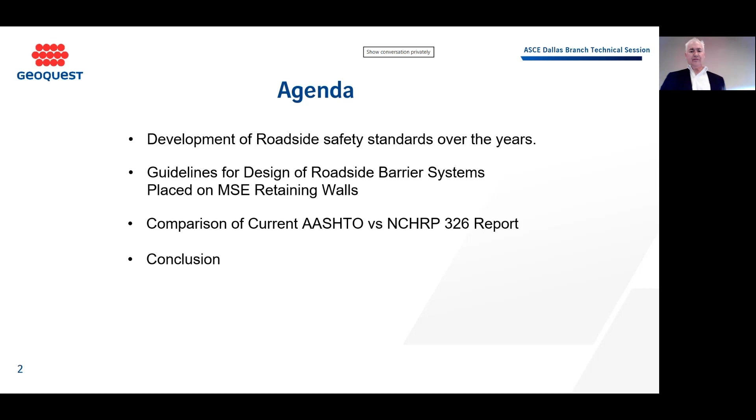So let me get into the development of roadside safety standards that has happened over the years. In the early 1900s, the birth of the automobile era happened. You had the development of the Model T by Henry Ford. Early automobiles shared the roads with horse-drawn wagons, and safety standards were virtually non-existent.

As we moved into the 1920s and 30s, rapid motorization led to increased fatalities. States began forming highway departments to oversee their road design. Roadside safety was primitive, and this was the start of early efforts for standardization of our roadway safety. The Manual on Uniform Traffic Control Devices was first published in 1935, setting national standards for road signs, signals, and markings, among other safety things. The introduction of the steel W-beam guardrail began in the late 1930s to prevent vehicles from running off a steep embankment, another development that happened in the 30s.

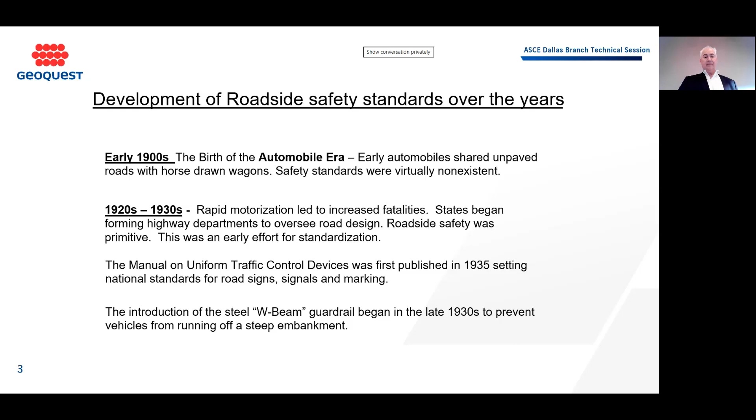As we move forward into the 1940s to the 50s, America built thousands of miles of new highways with more cars on the road, and they got a lot faster, so a lot more issues with fatalities could happen. Basic roadside hardware, guardrails, and bridge rails became more common in the 1940s and 50s.

In 1956, the Federal Aid Highway Act launched the Interstate Highway System. This entailed the numbering of roads, from east to west being even, and north to south being odd numbers. But it also triggered new safety engineering efforts, and introduced consistent design standards managed by what later became AASHTO.

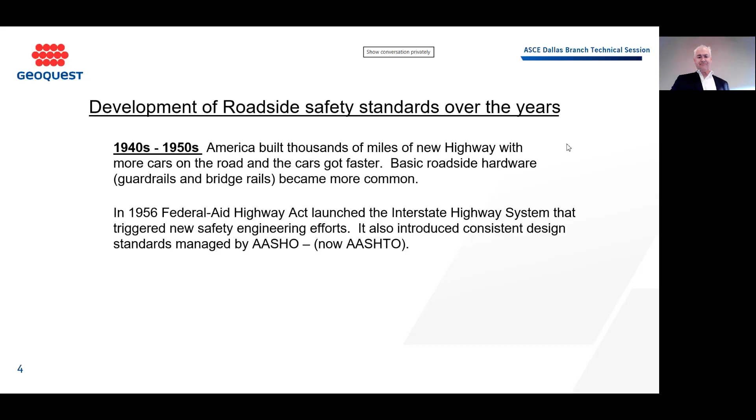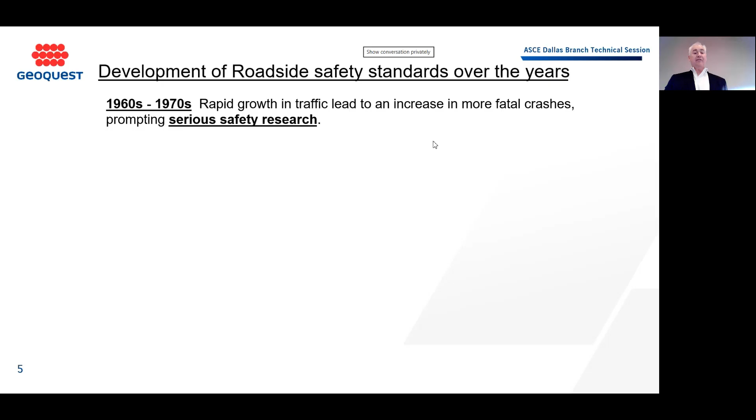In the 1960s to 70s, we had rapid growth in traffic, leading to an increase in fatality crashes. Cars got more congested on the highway, prompting serious safety research needs. In 1965, over 50,000 Americans were dying in traffic accidents each year, an alarming number that drew national attention.

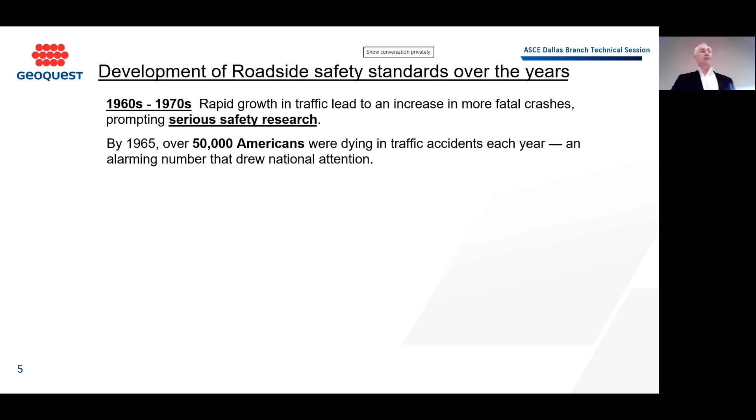In response, President Lyndon B. Johnson urged Congress to act, and Congress passed two major laws in 1966. One was the National Traffic and Motor Vehicle Safety Act of 1966, which focused on vehicle design itself, making certain safety features mandatory—this is where you probably got airbags and stronger cars. The other was the Highway Safety Act of 1966, focused on safer roads, driver behavior, and state highway safety programs. These two laws are considered among the most important laws passed in U.S. transportation history.

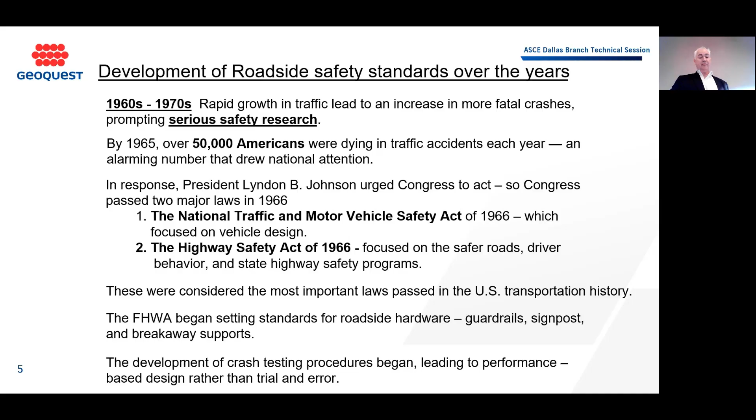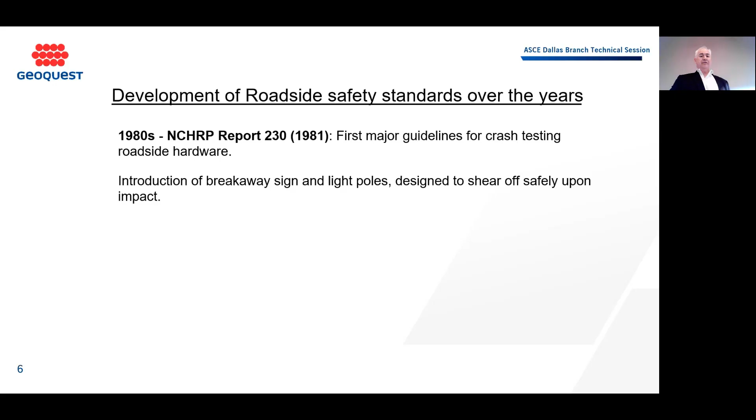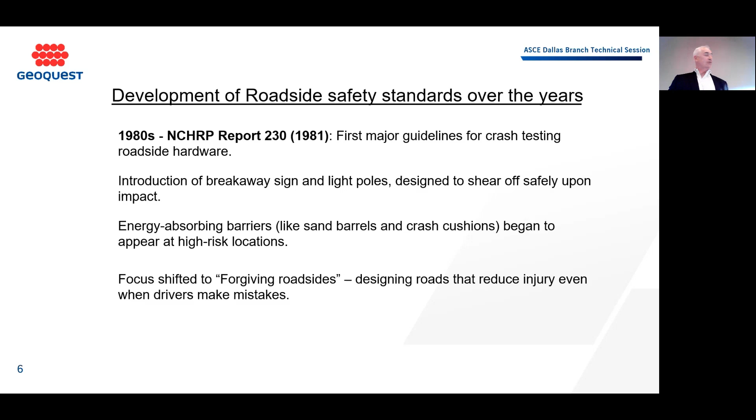FHWA began setting standards for roadside hardware, such as guardrails, signposts, and breakaway supports. The development of crash testing procedures began, leading to performance-based design rather than trial and error. In the 1980s, the first major guideline for crash testing of roadside hardware came out in the NCHRP 230 report in 1981. It also introduced breakaway signs and light poles designed to shear off safely upon impact. Energy-absorbing barriers like sand barrels and crash cushions began to appear at high-risk areas. The focus shifted to forgiving roadsides—designing roads that reduce injury despite driver mistakes.

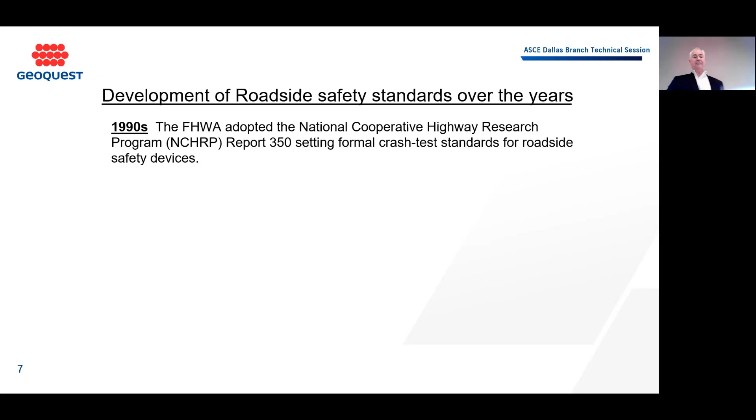NCHRP Report 350 set the formal crash test standards for roadside safety devices, published in 1993. This report was the first major national standard that introduced test levels, TL3 to TL5, for evaluating roadside safety hardware including guardrails, barriers, terminals, and crash cushions. Each test level corresponded to a specific impact condition, such as the vehicle type—was it a small car, a truck, a small van, or a semi-tractor trailer? It also looked at vehicle weight, speed, and the impact angle that the car would hit the hardware.

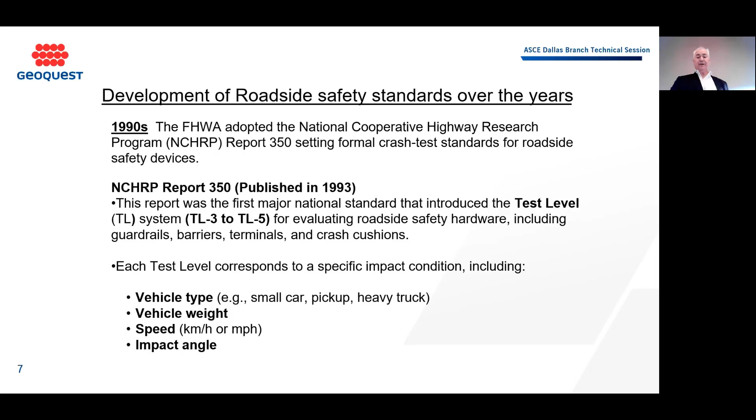So here's a summary of TL3 to TL5 from the NCHRP Report 350. You can see the test levels here, TL3 to 5, the vehicle type, the weight, the speed specified, the angle at which it would hit the barrier, and the typical use.

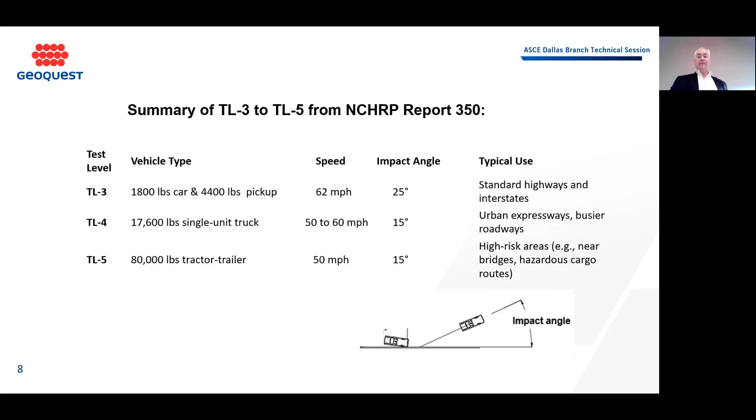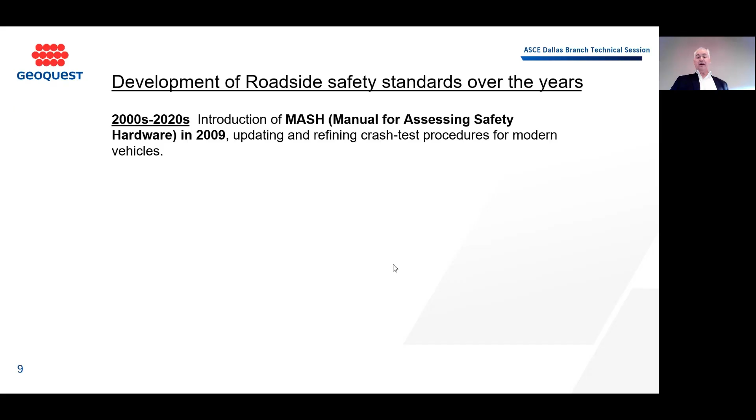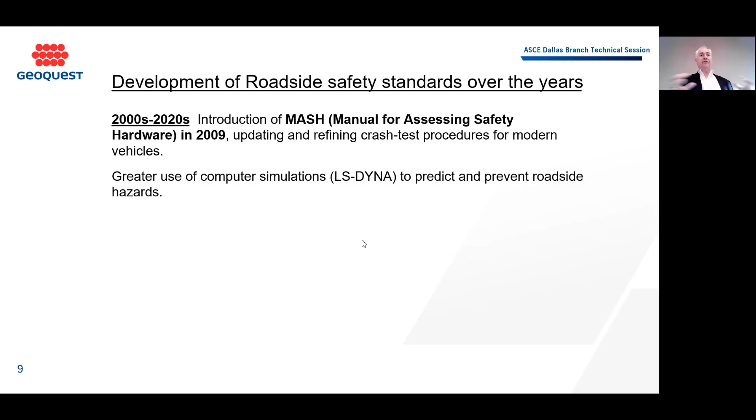In the 2000s to 2020, they introduced MASH, the Manual for Assessing Safety Hardware, which came out in 2009. It was an update refining crash test procedures for modern vehicles, and also introduced greater use of computer simulations through finite element modeling to predict and prevent roadside hazards. So besides crash testing, they also started using computer modeling.

AASHTO MASH 2009 was updated in 2016, and MASH replaced NCHRP Report 350 as the official crash testing standard in the United States. FHWA began requiring MASH-compliant hardware on any new or replaced installation after 2016, so anything new after that had to meet MASH requirements. From 2018 to 2020, MASH retained the TL1 to TL6 test level structure but updated the vehicle types, including heavier pickups.

Here's a MASH updated chart. You can see how much larger it got compared to the NCHRP 350 report. Some of the pickup weights and vehicles got heavier, and the speed stayed about the same, but they introduced TL1 and TL2, and now also have a TL6.

You can also look at the typical use: TL1 to 3 was typical for standard highways and interstates, TL4 was for urban expressways and busier roadways, and TL5 and 6 were for high-risk areas such as near bridges or hazardous cargo routes. These were defined typical usages. By the way, typically Geoquest does not specify the test level to be used on the barrier—this would come from the consulting firm designing it for the DOT.

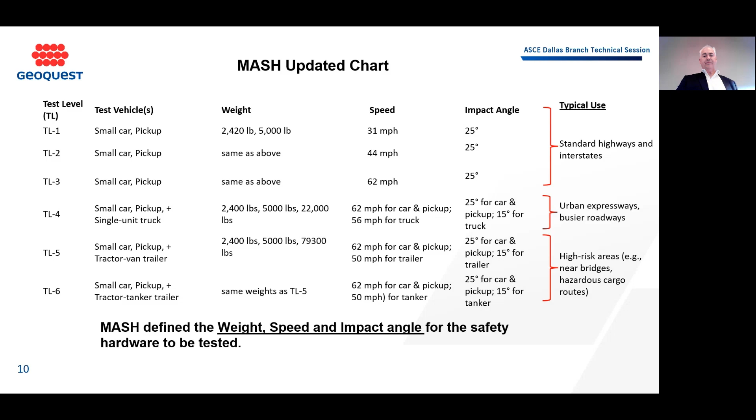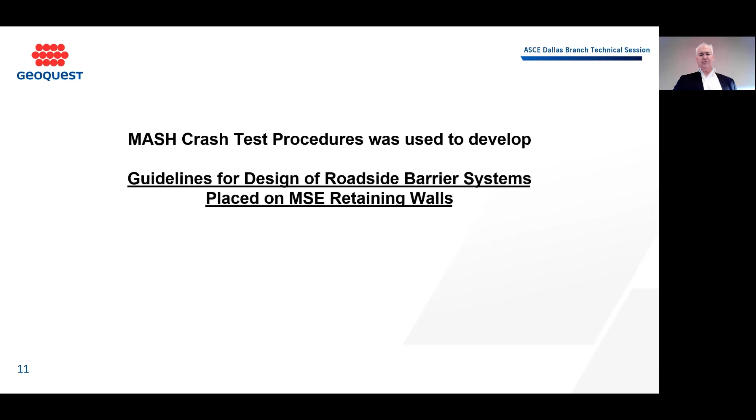So the MASH crash test procedures are now used, and I explained all that to get to this point: this was used to help develop the guideline for the design of the roadside barrier system placed on MSE walls. So we're going to see a lot of cool stuff here—some crash tests, and we'll see how they used that to develop the guideline.

So let's look at, as a reminder for the audience, what an MSE wall is. Some of you may not know, but it consists of a precast panel and reinforcing strips that are buried in the select backfill, and this comprises a mechanically stabilized earth retaining wall.

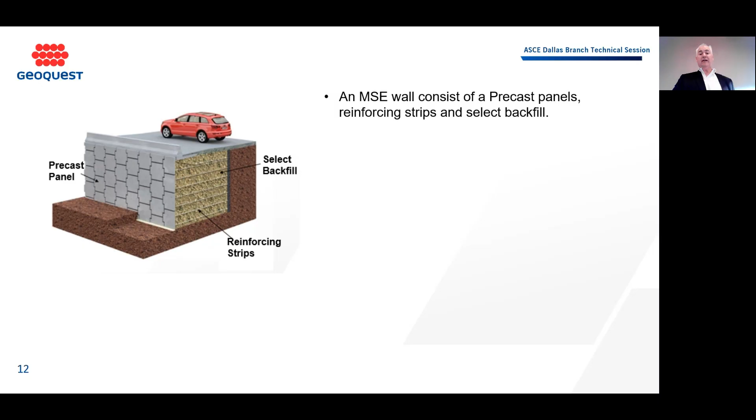MSE walls have been used since 1972 across the United States on highway infrastructure. An estimated 10 million square feet of MSE walls are used or constructed annually in the United States, so you can see how many MSE walls are being used on our highway infrastructure.

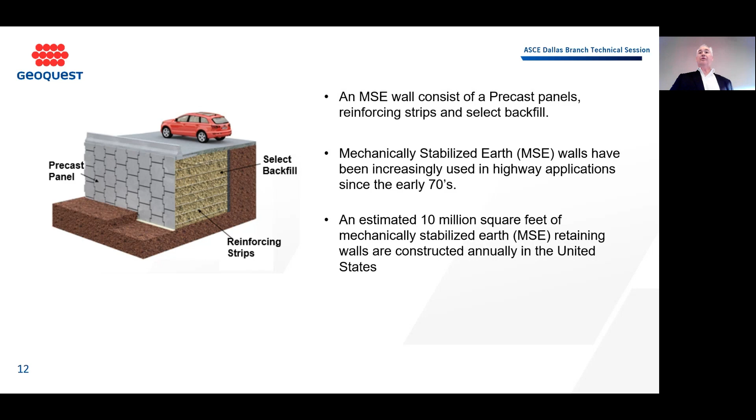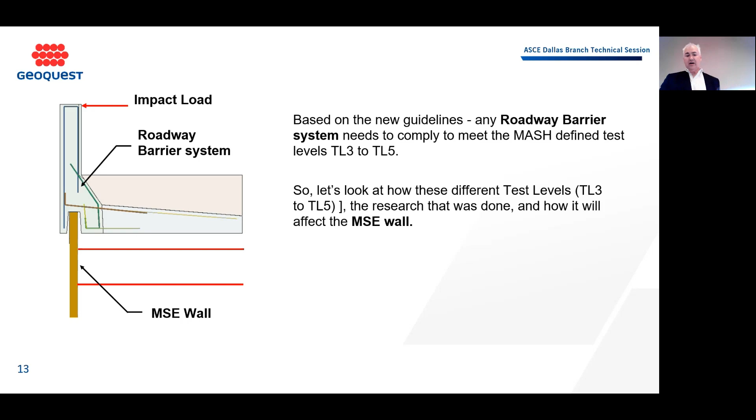Based on the new guidelines, any roadway barrier system consists of the barrier itself, the coping, and the moment slab. This is what the barrier rail system consists of. It needs to comply with the MASH defined test levels TL3 to TL5. Let's look at how these test levels, and the research that was done, affect an MSE wall.

One of the major uses of MSE walls here across the United States is for bridge approach embankments. You can see in the picture below an MSE wall typically used up to a bridge structure, which is typically 25 to 30 feet. You have an MSE wall, and typically it's constructed with the roadside barrier system on top of the wall, and that barrier wall needs to line up with the bridge rail on the bridge deck. You see a lot of that.

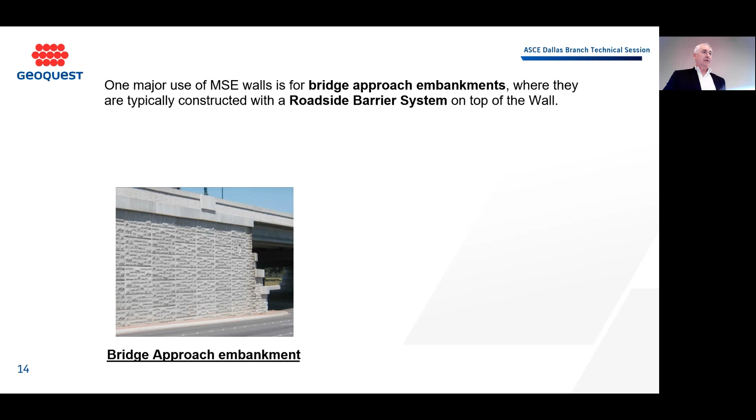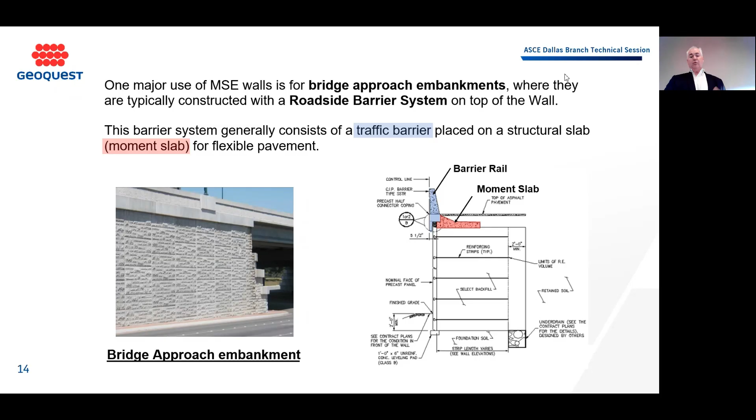The barrier system generally consists of a traffic barrier placed on a structural slab, a moment slab, for flexible pavement. Here's a section of an MSE wall, and what I'm pointing to is a barrier rail, then the moment slab, and this is what the barrier rail system consists of on top of the wall. This is what we're going to look at.

So understanding the behavior of the barrier system and the interaction with the MSE wall is very critical.

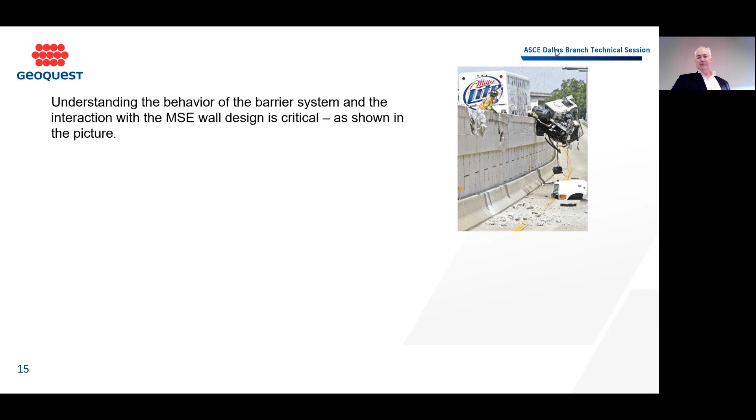As you can see here in the picture, this Miller Lite truck did its job. It survived. It shouldn't have gone over the barrier. Should it deflect it? But you can see here, it really took a big chunk out of the concrete barrier. The cab was demolished, but luckily the beer was saved in the truck. That was from, I think, Fort Worth. I'm not sure of the details about the driver, but it was an interesting picture that I thought I'd show.

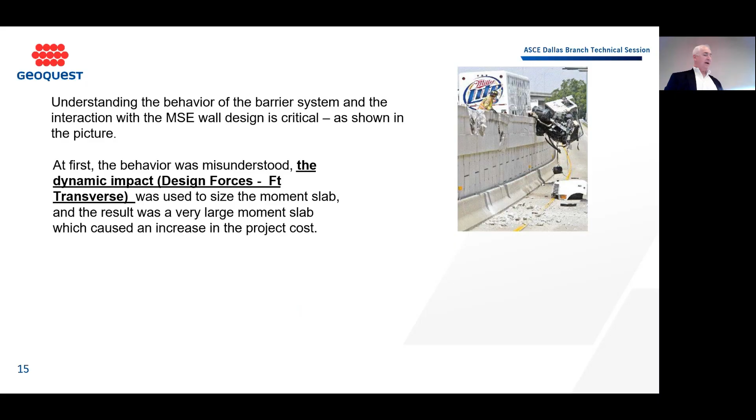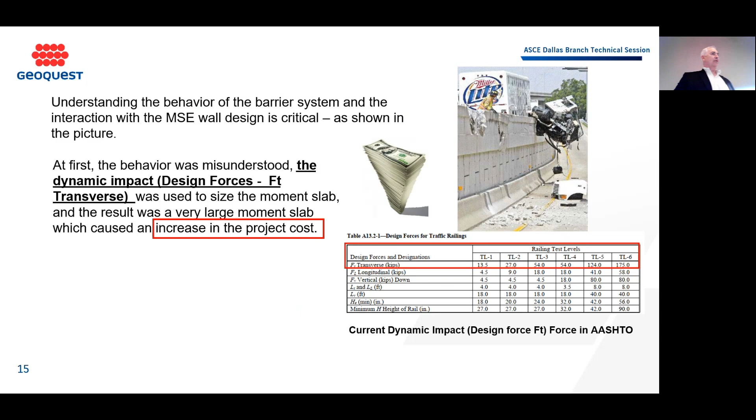Through the years and through our work with Texas A&M University's TTI Center, one thing I believe was misunderstood was that the dynamic impact design force, FT, in this chart, was used to design the moment slab width. In other words, the dynamic loads were being used to develop the size of the slab, and our taxpayers' dollars were being wasted. A lot of money spent on something that wasn't needed.

So this spurred AASHTO, in cooperation with FHWA, to start developing guidelines for design of roadway barrier systems placed on an MSE retaining wall. This was done under the National Cooperative Highway Research Program, the NCHRP.

This study was needed for several reasons. Number one, to come up with a more economical design for the barrier rail system with the moment slab at the different test levels, and also to look at how it affects an MSE wall.

This chart shows the current impact forces, currently in AASHTO right now. You can see they call them design forces, which is somewhat misleading because that's really a dynamic load. For TL3 and 4, it's a 54 kip load. I'll show you later where the NCHRP increased that.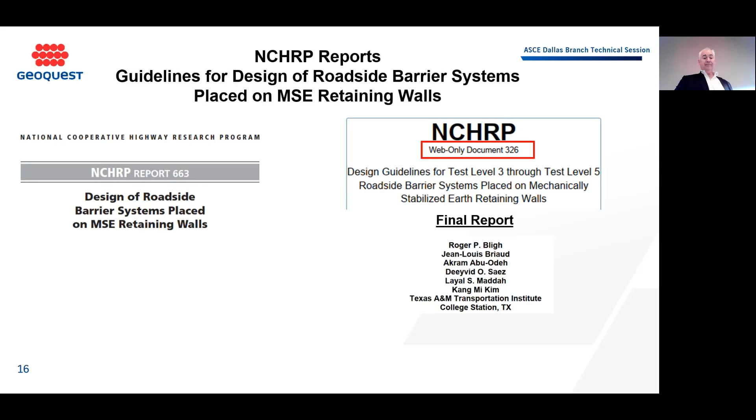The people involved included Dr. Roger Bligh and Dr. Jean-Louis Briaud at A&M, who led this document and study. And by the way, GeoQuest, or Reinforced Earth, we were very involved from the very beginning.

You can see here we had some acknowledgments in the report. Pete Anderson, our colleague from Boston, Carl Sanders, and myself were involved throughout all the studies they did for the crash testing down at the TTI Center in College Station.

So the NCHRP 326 was a final report. This was dedicated to developing guidelines for the barrier moment slab system placed on MSE walls to resist vehicle impact loads resulting from the three test levels, TL3 to TL5, and guidelines for the MSE wall. So this was what the whole purpose was, to size a moment slab and figure out what happens on the MSE wall structure.

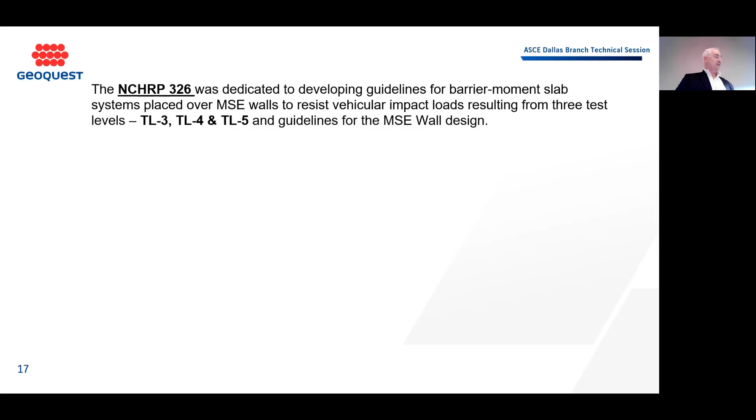The recommendations provided guidance on dynamic loads applied on the traffic barrier for the requirement for the barrier design. So the impact load hits the barrier first, so you have to design the barrier, and I'll show you some stuff. They use a yield line analysis on that.

And then it came up with a static load equivalent on the dynamic loads used to calculate the moment slab width. This was the main thing I told you earlier. They want to try to reduce the moment slab size, so they came up with some equivalent loads, and I'll show you how they did that in a minute. Then also, the last was they came up with some pullout and yielding pressures that we needed to design the retaining wall for.

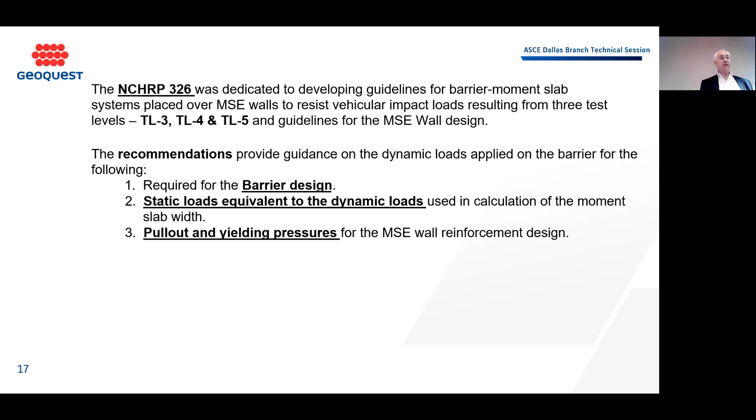The analysis performed include predictions of impact loads based on measured test data, really the crash test performance they did, crash test studies they did on a TL3 to TL5. And they also looked at finite element impact analysis simulations. So not only did they have the crash test, but they also had simulations in a finite element model used to look at the different load conditions there.

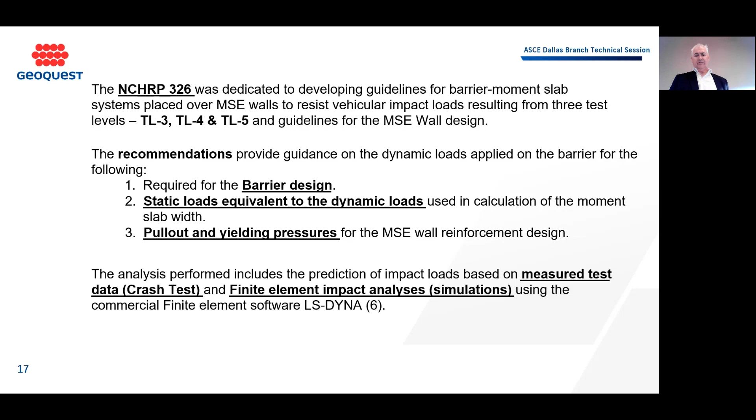Okay, so I just threw this picture in here because I thought it was cool. It showed you kind of the size of a small truck and pickup. You can see the small unit truck, and then you can eventually see the tractor trailer here. You can see graphically the moment slabs relative to the size they came up with. The TL3 was about 4 foot wide, the TL4 is 4.5, and on the TL5, the moment slab ended up being 12 foot wide. I'll show you some results and how they got to that here in a minute.

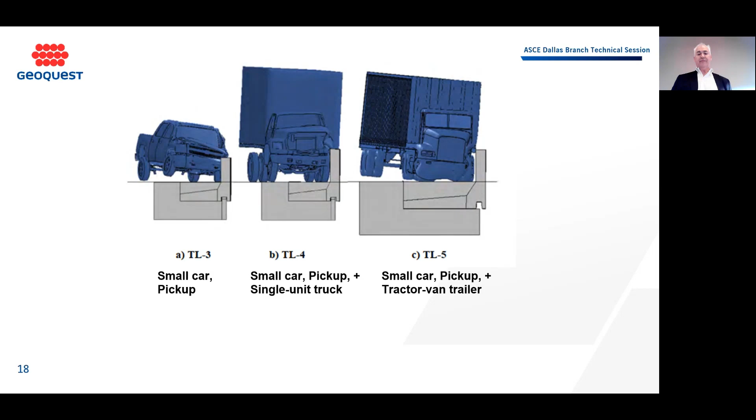But meanwhile, let's look at some video. So this was the TL4 impact crash test. This was done down at TTI Center. They had an old runway where they converted into where they crash tested. TTI was very famous for crash testing the hardware, safety hardware, to meet the MASH criteria. So what happened was, back in the early mid 2000s, Geoquest got involved.

You can see the MSE wall down below here. This was a cruciform panel. It was highly instrumented. You can see this truck doesn't have a motor, it's being pulled by a cable. The pulley is right there on the ground. So this cable is pulling this way, and another truck is pulling it to the left on the screen here, and it's getting it up to 62 miles an hour.

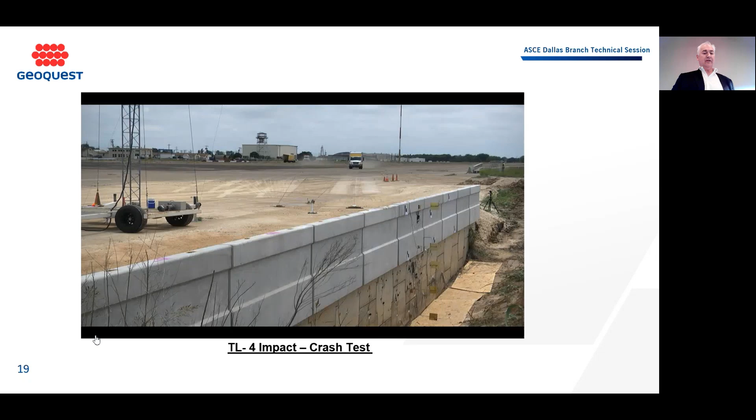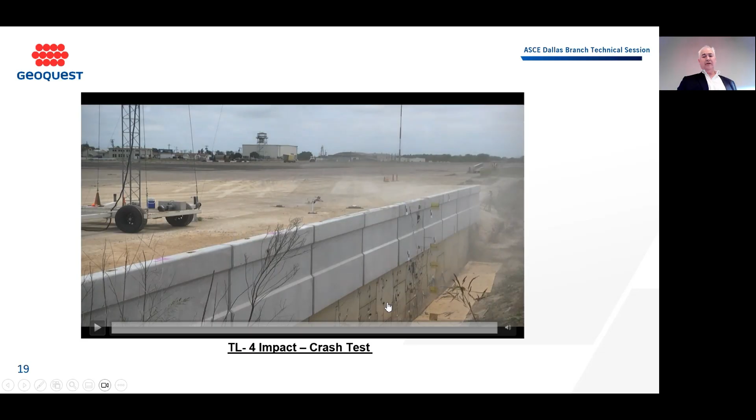And here is the crash test. Watch, the front end's going to hit it. Then the second load, the back end of the truck swings around and hits it again, and that's another big load that happens. That's a TL4. Here's another side view of it. So they're measuring all this, and they're measuring the dynamic load that hit the barrier on that.

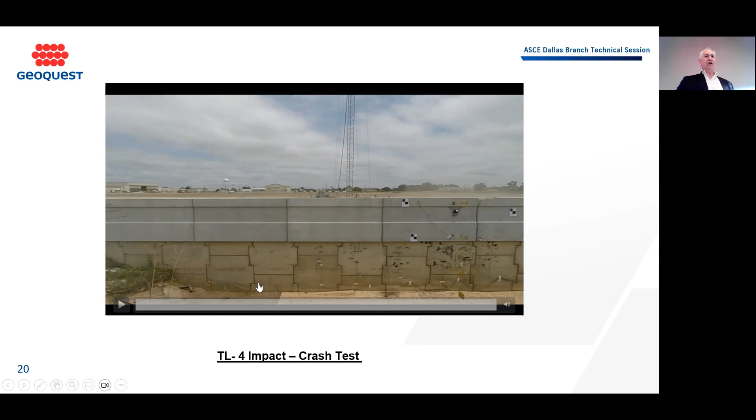Now here's the Big Daddy. So this is the TL5 impact loading. You can't see the retaining wall, but the barrier is on top, and they have an instrumented retaining wall below it, and they're also instrumenting the barrier for movement and deflections and what's happening there.

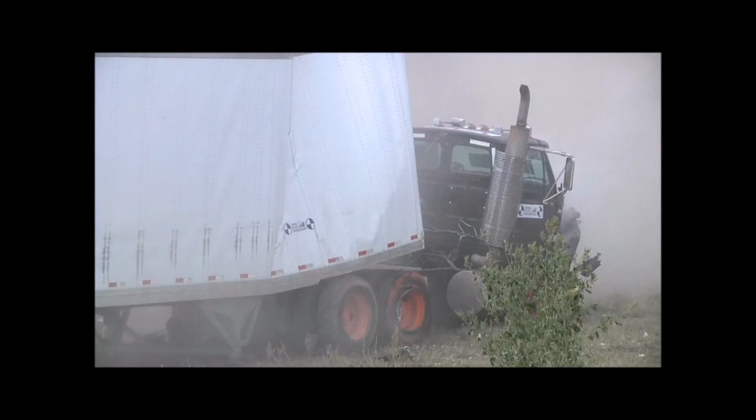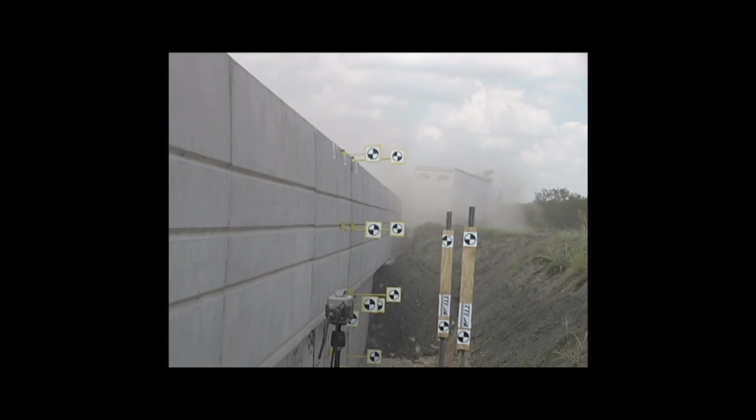So what I'm saying is the TTI Center was very precise. They knew what they were doing. They had instrumentation, they had strain gauges everywhere. And so when they wrote the report, it was very detailed. This report was, I think, 400 pages long.

So from all that, from all the crash testing, you can see here some pictures. We have real crash testing shown on the left. I'm sorry, I didn't have the TL3 truck one, I couldn't find it, but you can see how they did crash testing on the left, and then on the right, they had the simulation that they used in the finite element study.

So from that, you can see the peak dynamic force here. You can see the graph. You can see the initial hit for the TL3 load was highest at the initial hit, and then the back end of the truck swung around, and you had a higher load hit there. So that's what that is. So this is the front, and then this is the back of the truck. So the maximum dynamic force was determined both for the crash tests and for the simulations.

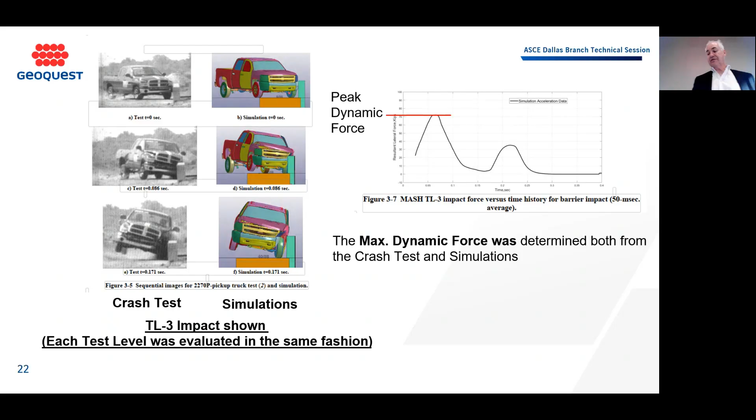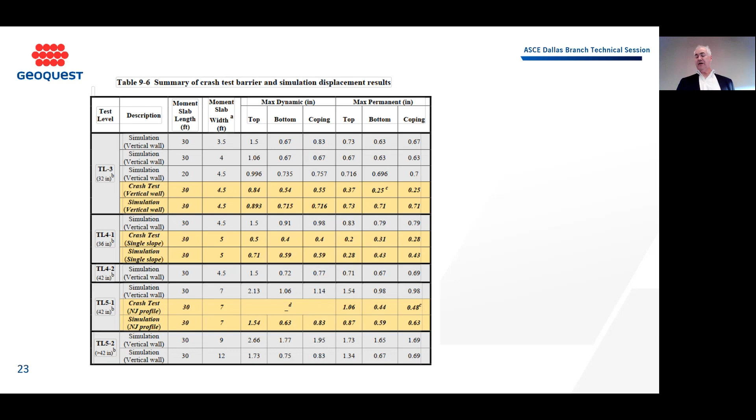This chart here was in the report. It's table 9.6, a summary of the crash test, barrier, and simulations displacement results. This whole test was a function of how much it displaced, so this was kind of the guiding thing.

The thing to look at here was that not all the tests were crash tested. A lot of them were simulations in the model. So what they did was, when they set the finite element model up, they calibrated it from the crash test to get it as close as possible. You can do a lot of manipulations with the simulations, with the computer program, because when you do a crash test, it's not cheap. So this is the way they did it, and you can see what they did.

So here, for example, the TL 5.2, you can see the loads that they got from this one was all based on the computer modeling simulations. It wasn't from crash testing.

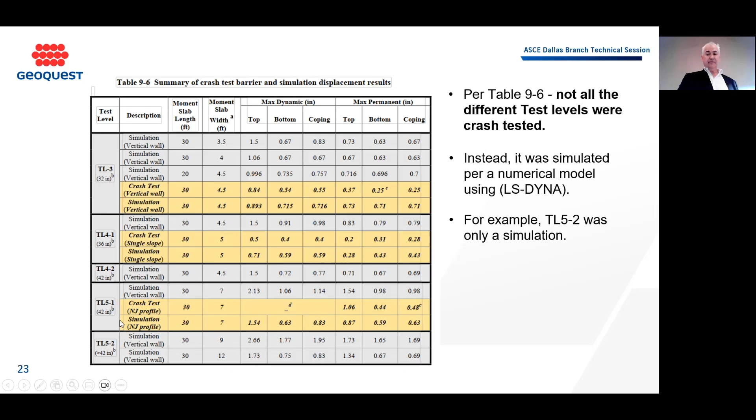The objective was to determine a moment slab width that resulted in a maximum permanent deformation of the coping. You can see here in the very far right column, the coping, and you can see that they said, okay, what is the minimum moment slab width to keep the deflection down?

For the TL3, they had a 4 foot minimum moment slab width. It's in the report, this minimum width of 4 foot, you can see a 0.63 inch deformation of the coping. For the TL4, they had a 4.5 foot moment slab width minimum, 0.79. And then we got the 7 foot and a 12 foot for the TL 5.1 and 5.2.

One thing to notice is that you can see here in the line, for the TL3 for example, the crash test and the simulations are side by side. You can see the deformations of the crash test was 0.25, but yet for the simulations, 0.71. So that tells me that the simulations they did were a little bit conservative, to simulate the model.

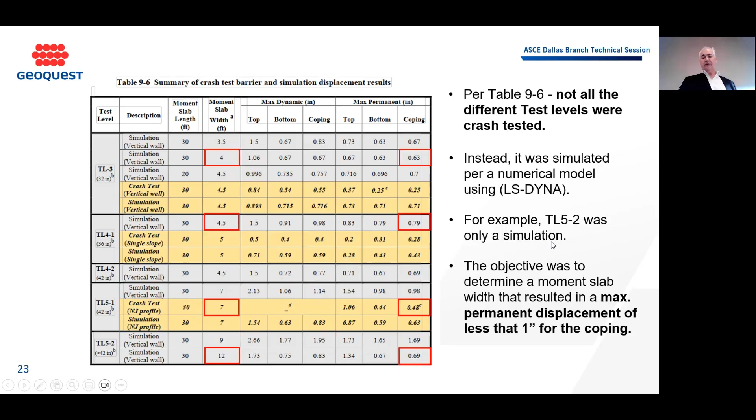So one thing that I was telling you was that they developed the dynamic loads from the crash testing. And this dynamic load, the new one, LD, is used for the barrier design.

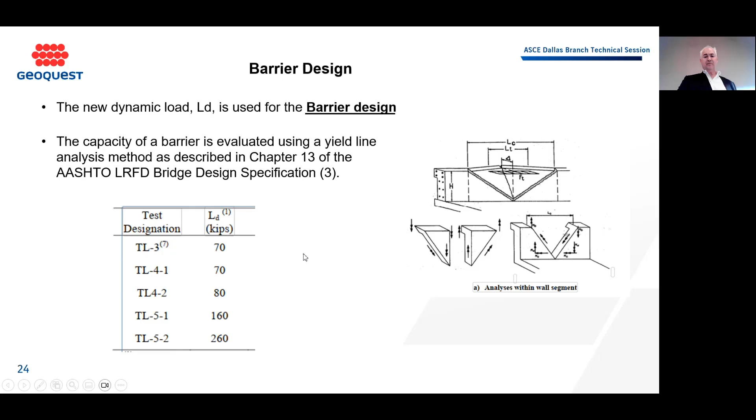So when you design the barrier, they use a yield line analysis in chapter, it's in AASHTO. You can see the new loads here: for the TL3 and the TL41 is 70 kips, TL42 is 80, and then 160 and 260. But these loads were calculated based on crash testing and the simulations that they were getting. So that's one thing that they developed in the study.

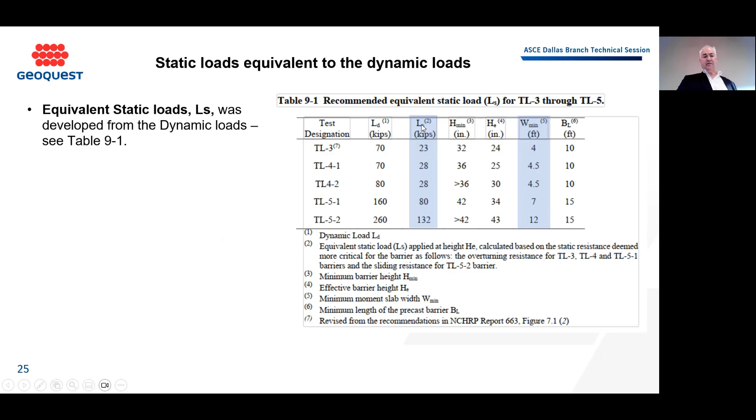The other thing was the static load equivalence to the dynamic loads. I can show you that the equivalent static load LS was developed from the dynamic loads from table 9.1. You can see here the LS, this was the equivalent static loads that they developed from that. The equivalent static load is used to determine the size of the moment slab.

The recommended moment slab width is W min. The way they determined that is we knew what the structure was based on the real crash testing. They knew the structure, they knew the size of the moment, the barrier, they knew the dynamic load, and from what they did was they just back calculated what the equivalent capacity demand ratio of the barrier system, and they got the equivalent load that way. That's how they determine the equivalent static load.

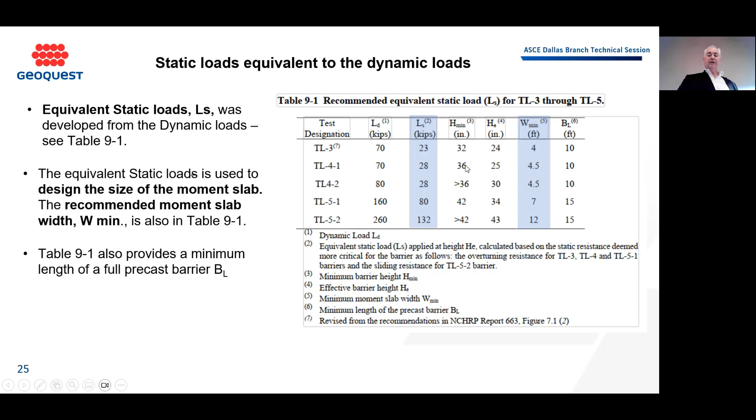The 9.1 also provides a minimum length for a precast full barrier. Sometimes we precast a full barrier, and if you want to do a TL3 to TL4, then it needs to be a 10-foot minimum length. And then when you get into TL5, 1 and 2, you need to have a 15-foot long precast full barrier. Sometimes people do that, like up in the north regions where you have labor shortages, they like to precast a barrier and you don't have to slip form it like they do down here, but that's an option that is in other states.

Let's look at the calculation of the pullout and the yielding pressures that were developed from the crash testing.

So let's look at the load path. First, it hits the top of the barrier as shown here in red. The load path goes to the barrier and down into the coping and into the moment slab. And then from the moment slab, it's a vertical pressure into the soil.

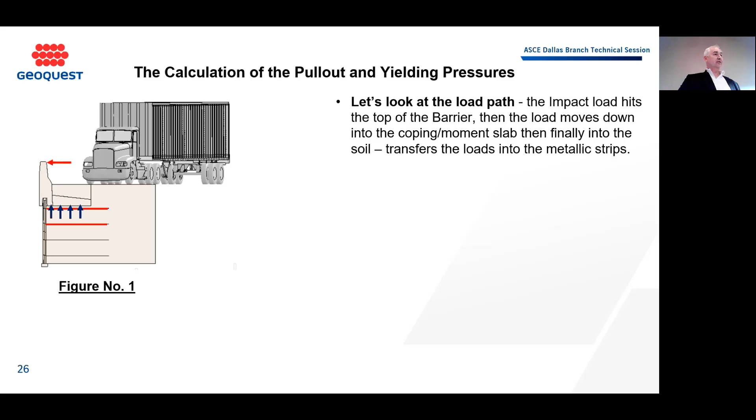So the vertical pressure into the soil is a vertical load. Then you multiply that times the coefficient of lateral earth pressure, and you can get the loads that transfer into the strips. That's just a cool picture I added in there.

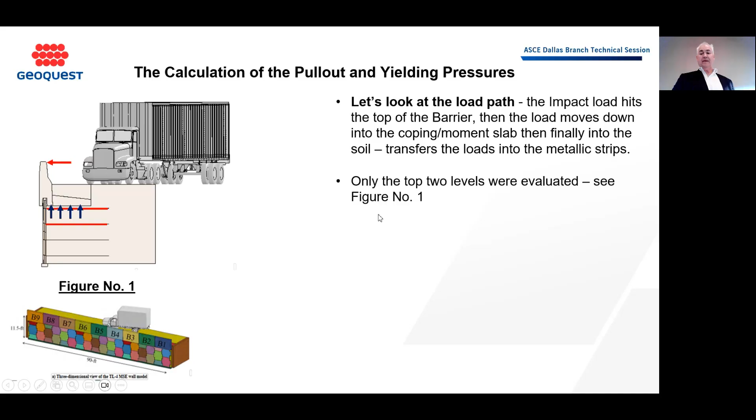Only the top 2 strip levels were tested. So in the report, they only monitored the top 2 strip levels, as shown here in red on the left. Strain gauges were placed on the metallic strips to measure the dynamic loads and what was happening in the loads being transferred into the strip.

In the wall reinforcement design, there are 2 modes of failure. Number 1, it can pull out of the soil just from the reaction, and it also can yield the steel. So these are the 2 things we are concerned with, and these are the 2 things they developed the pressures for.

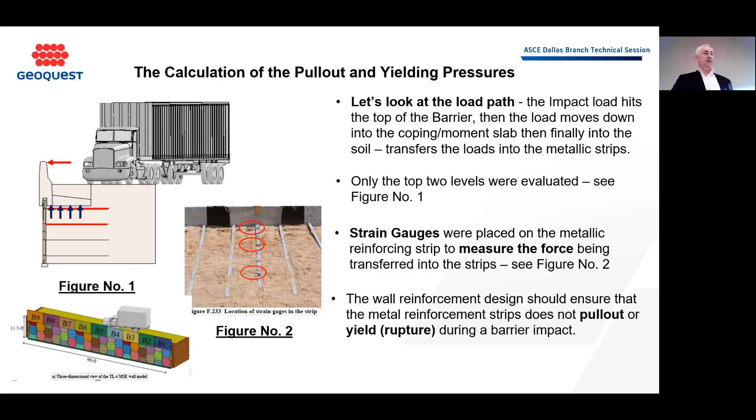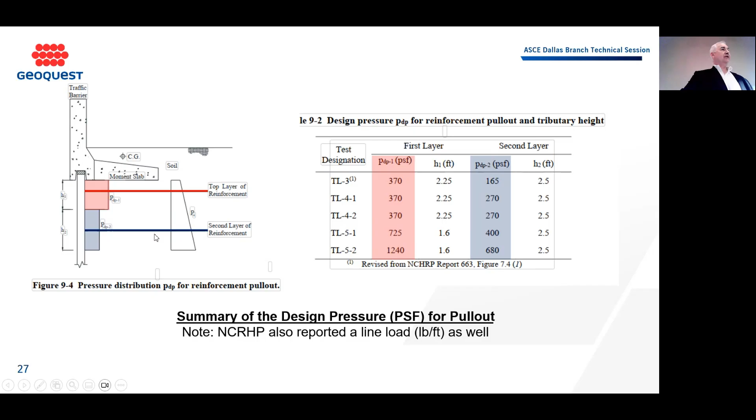So here's a pressure diagram that came from the NCHRP 663 report. This was design pressures for the reinforcement pullout and the tributary heights. You can see here in red that the top strip obviously gets more load. So the load is higher, about 1.24 KSF pressure down to 0.37, depending on the test level they're testing. Then the second level is a lot lower, as you can see here. So if this report is used in the design, then we would check our bond pullout for these pressures.

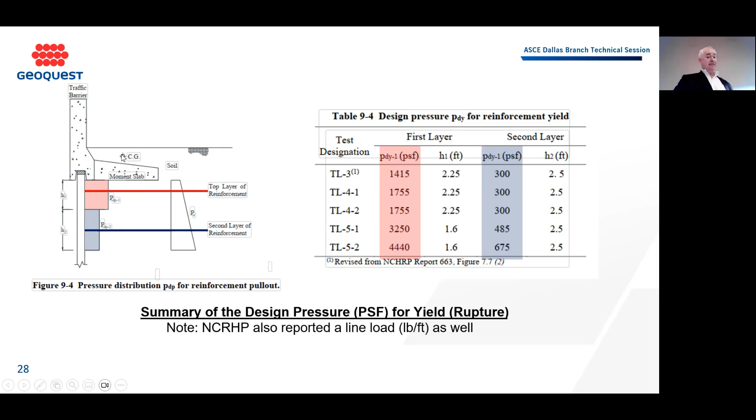Going to the design pressures for the reinforcement yield, this means we check this against the steel yielding or rupturing. You can see for TL 5.2, it's a huge load of 4.44 KSF pressure at the top of the panel, and then the lower ones are a little bit lower. So this is what we have to design for if it's specified. This is not approved in AASHTO yet.

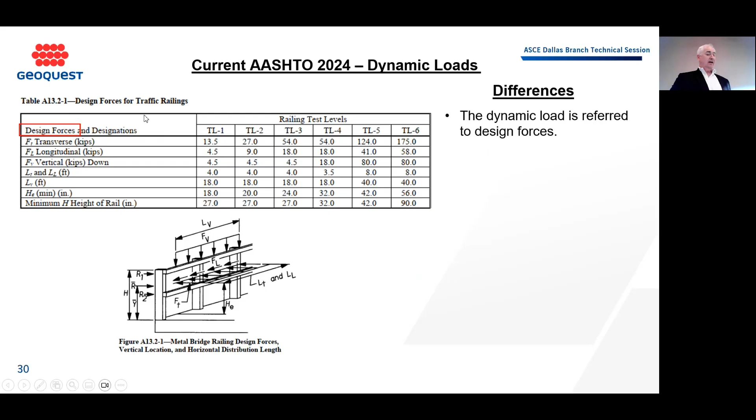So let's compare the current AASHTO to the NCHRP report. This is the current AASHTO forces here. The difference is that the dynamic loads are referred to as design forces, so that's one thing that could be confusing. The AASHTO dynamic loads are significantly less than the NCHRP report. I'll show you in a minute on that.

There are more test levels in the AASHTO. They have a TL 1, 2, and 6 now, and this is a function of the speed and the height of the rail. There's more information provided in the AASHTO than the NCHRP, such as the longitudinal and vertical loads shown right here.

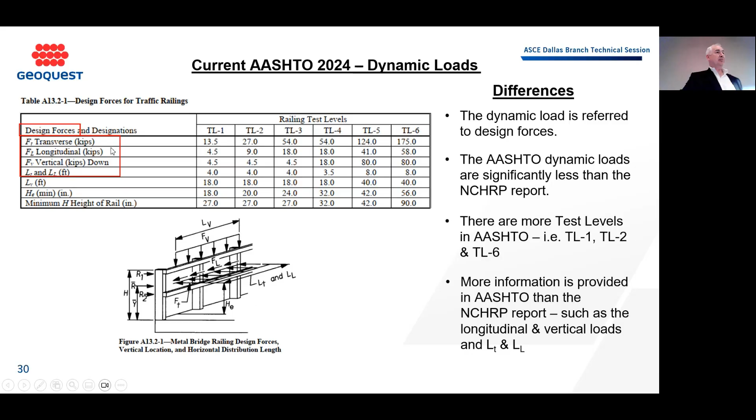We've already talked about this. The NCHRP report also has intermediate levels. So the AASHTO only has TL4, but now the NCHRP has a 4.1 and 4.2, and so on.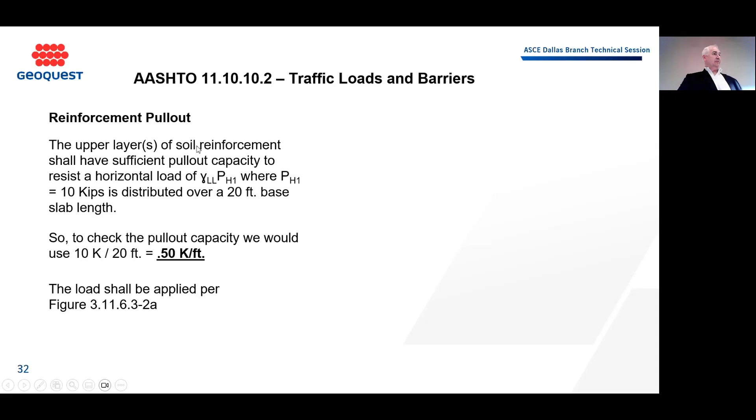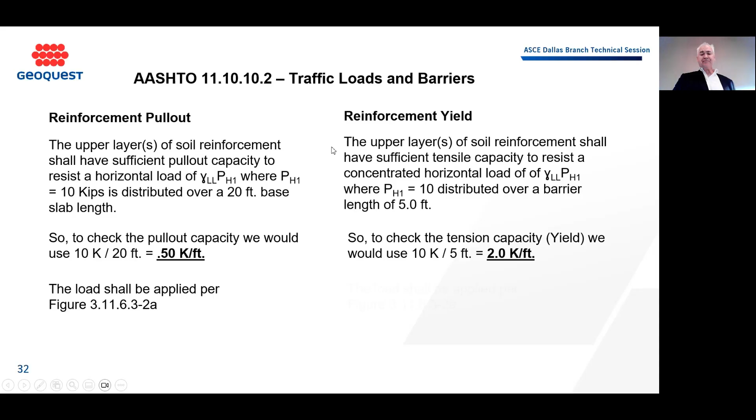The reinforcement pullout for traffic in AASHTO, the current AASHTO criteria says you use a 10 kip load divided over 20 feet, basically getting 0.5 kips per foot in that loading, and then you have to apply it according to this chart. For the yielding, it says to design a 10 kip load over 5 feet, which yields about 2 kips per foot on the strip design, and again it's applied according to the figure right here.

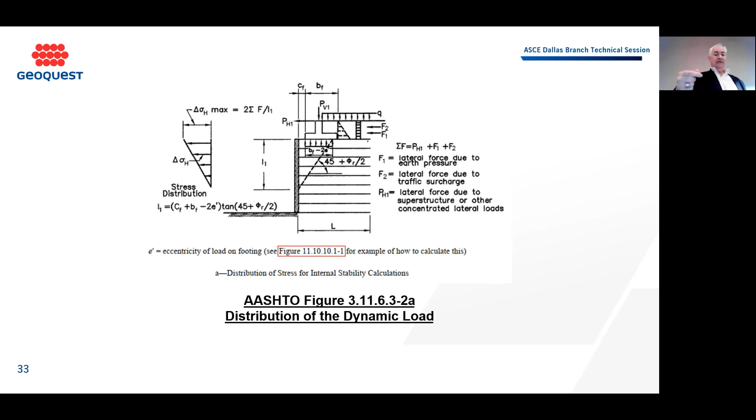So the way they do the loading is they take the load, distribute it triangularly on it, and we can calculate the pressure on top of the wall here.

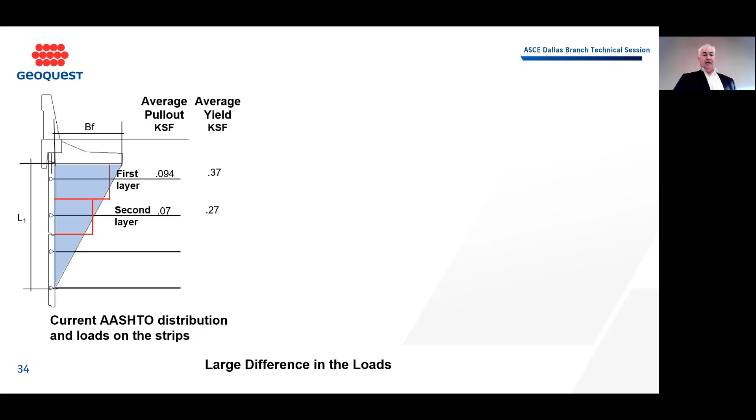This is the distribution. The average pullout value here is 0.094 KSF. This is the AASHTO standard now. The average yield is 0.37 and 0.27 accordingly.

When you look at NCHRP report 326, you can see the huge difference when you have to design for this. For pullout, you go from 0.37 KSF to 1.24 on the top strip versus 0.094. This is a really dramatic increase, and this reporting has a dramatic impact on MSE wall design.

The second level is not as bad, but if you look at yield, it goes from 1.4 all the way to 4.4 KSF, versus the AASHTO way where you're looking at 0.37 KSF versus a potential 4.4. So a very big difference in the loads here.

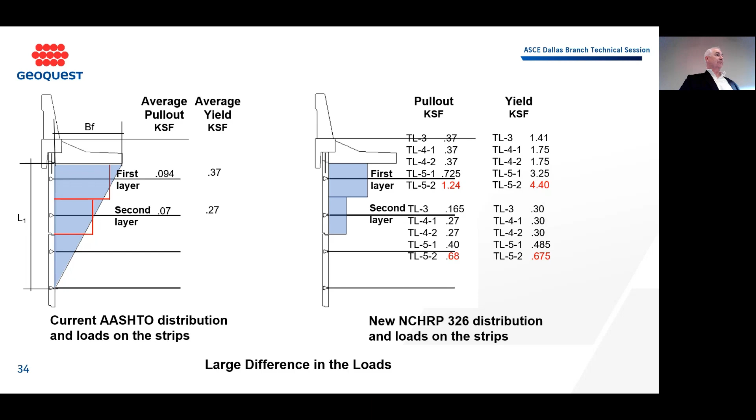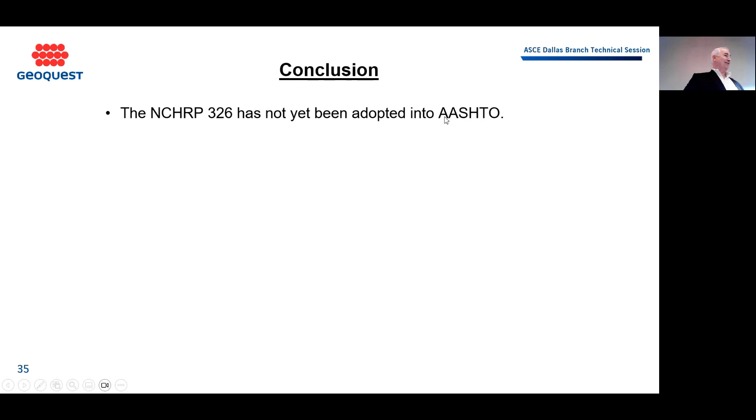The conclusion is it's not adopted in AASHTO, and I'm not saying to use this, I'm just saying it's not in AASHTO. So consultants that specify this can specify it according to your DOT. They may want you to use AASHTO, or they may say you need to implement NCHRP 326. We've seen it both ways across the United States, with some DOTs wanting you to design the wall according to NCHRP 326. So we've seen a lot of misunderstanding and miscommunication, and it's not well thought out yet.

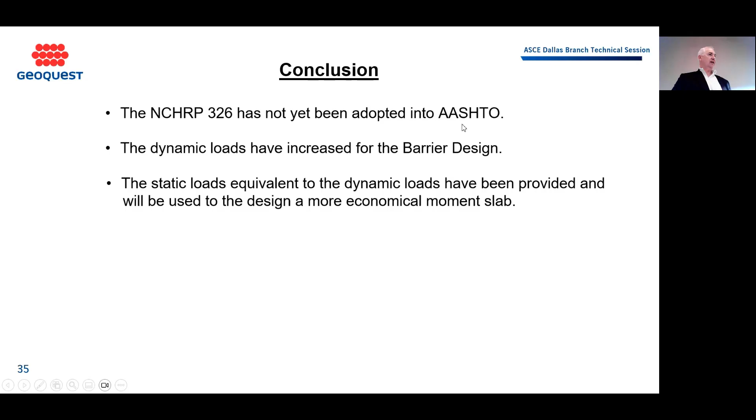So the dynamic loads have increased for the barrier design, as we talked about. The static load equivalents now will yield some reasonable economical moment slabs. The pullout and yielding pressures have been provided to design the top two levels. The loads have tremendously increased from the current AASHTO, and the new loads will significantly increase the design of the soil reinforcements if we have to design for that.

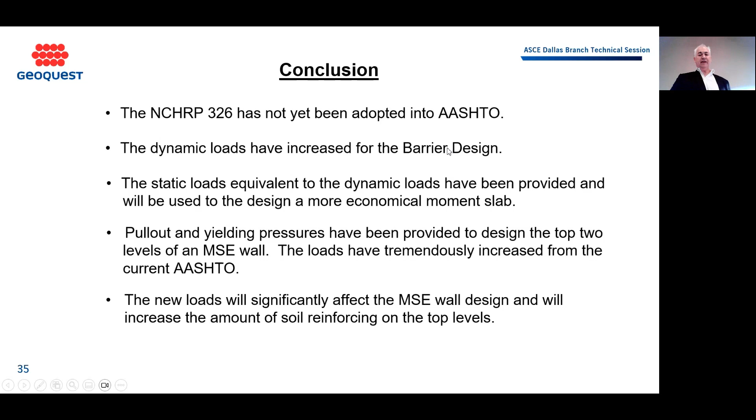Keep in mind, the recommendations of the NCHRP report were based on testing of metallic reinforcing strips of an MSE wall. What I've seen across the United States is a lot of people want to apply this to other different wall types. Say we have a tech wall, which is a precast counterforted wall system, or a T wall, which is a precast stem T, like a modular wall.

We have a T wall, which is a precast stem T, like a modular wall. And they specify that we apply these loads to these types of walls. This is where we disagree, because we think this is an inappropriate way of using it. Caution should be used when extrapolating these results for the design of other types of wall systems.

What was tested was metallic reinforcing strips, and they should be used for an MSE wall. When they try to use it for these other kinds of walls, I think it could be either underestimated or overestimated. We don't know, but they need to study this kind of wall. This is what we're seeing across the board, across the United States—people are specifying it, and I don't believe it's being done correctly.

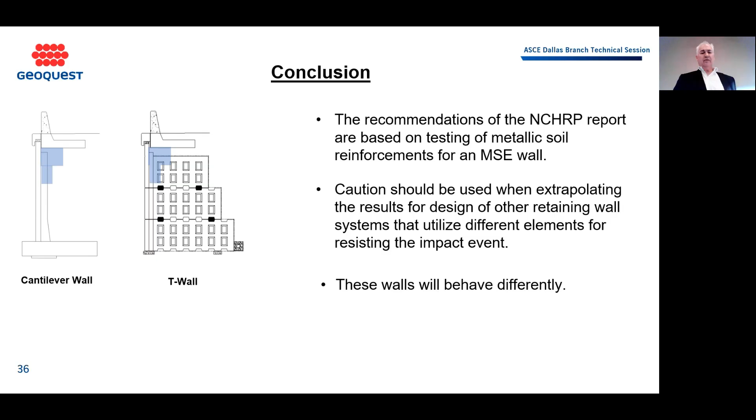The walls have a different behavior—they could be stiffer, or they could deflect more. We just need to study it. That's it, any questions? I know that was kind of quick.

Questions? Yeah. Yeah.

TxDOT right now follows the current AASHTO standard. If you look at their rail sheets, it says it's been in compliance with MASH TL4. TxDOT doesn't enforce that you follow all of AASHTO—in the past, they haven't. So we haven't even been using the AASHTO criteria for the strip design. I don't know what they're going to do. I know they came out with LRFD, so I'm not sure if they will look at this or not.

I don't think the DOTs are fully accepting this report as guidance. I think it's a report done by TTI and the PhDs that did the research. You can download this report and look at it—there are all these guidelines in there. So I think each state would have to decide if they want to introduce it into their work.

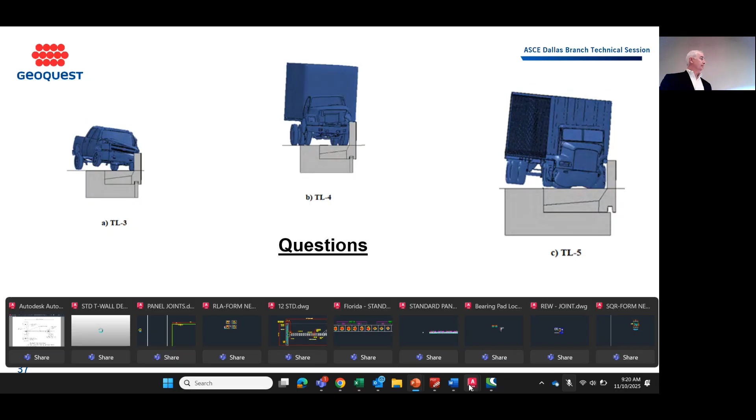So there's a lot of commentary, and I'm going through this on my own projects, where you have to read the commentary and understand the difference between a dynamic load and a design load, and which one you design for. We had this conversation last week: do you use this specific load for stability and this other one for reinforcing? There's just a lot of misunderstanding of how to use the information in AASHTO.

As engineers, we have to look at the code and interpret it. I have my discussions with David—in fact, David and I have known each other almost 15 years. I come to him as a resource; I've got him on speed dial.

I encourage each one of you to get him on speed dial, because when you have questions like this, when you're reviewing his shop drawings, when you want to get those things in the ground quicker, there's no better way than picking up a phone. Some owners get a little squirrely about that, but at the end of the day they want their projects in the ground, and we want to make sure we're on the same page as the folks putting it in the ground. So I highly encourage everyone to do that.